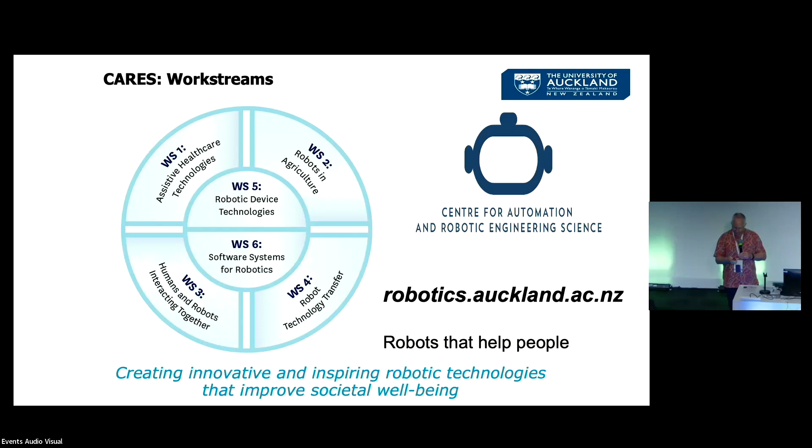And this is an example. I'll talk a bit now about our robot assistance project. Let me just figure out how to start the video.

Here we go. So this is one of the more recent studies we did, of robots with people who have respiratory problems.

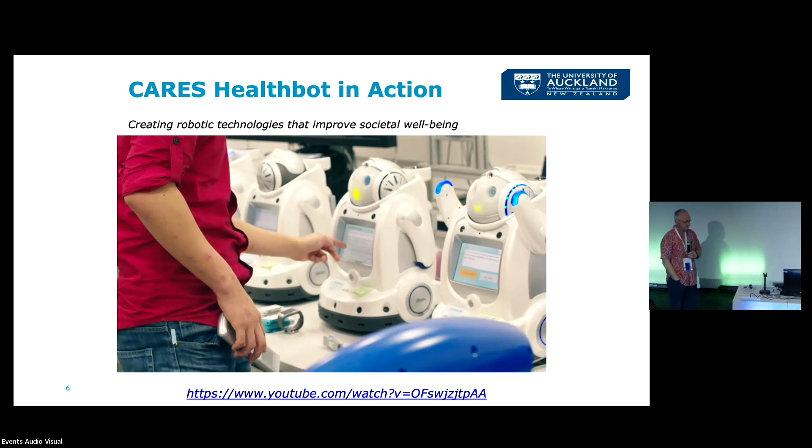This project is funded by the HRC as part of a partnership program in innovation. This particular project is looking at whether the robots can reduce hospitalizations in patients with chronic obstructive pulmonary disease, which is a chronic lung condition.

In this study, we are recruiting 60 patients. They're recruited from hospital, so after they've been in hospital for a COPD exacerbation, we recruit them and then we randomize them. So half of them get a robot to take home with them and half of them get standard care.

This project is across both the Faculty of Medical and Health Sciences as well as Middlemore Hospital, and also with Faculty of Engineering. The technical challenge for us has been to put the software on the robot so that it does the functions it needs to do in interacting with people. And that's really taking some kind of medical therapy and translating it so that it runs in software on the robot.

There's a lot of things that have to kind of align. It's not just one bit of software like a game or something that has to integrate with the rest of the environment. So that's quite a challenge to get it robust enough. Those are the main challenges.

Another one was connecting devices to the robot. To do that, we need to hook a device up to the robot and program it to talk to that device. That shouldn't be challenging, but in practice it turns out to be more challenging than expected because it's quite hard to get devices that are open to us connecting up to them. So we had to do quite a bit of work.

Personally, I'm amazed at how well the robot is actually getting along with our patients. The patients have taken very well to the robot. They see them as an extra companion at home. But in addition to being a companion, it actually helps them check their health status, and then it gives us the connection as a health professional to monitor them at home. So the patients absolutely love it.

Please take your pulse.

When I actually got to use him and found out what he does, I was excited. It kind of changed my life.

Quite often, older people who live alone are at greater risk of exacerbations. So we hope that these robots will reduce some of that isolation.

He's very good company, and he does remind me of a lot of things, mainly my medication.

Let me know when you are ready to take it.

He's on the ball for me all the time.

One of the things that's different about this project is we really want to understand more deeply about how people and robots interact. In this study, the robots are with people for 4 months in their homes, 24/7. That's a long time for a research study and for us to analyze and record data. We're getting information about what happens when people get used to the robot, have time to think about it, and use it every day.

Thank you for taking your medications.

So we're hoping functions on the robot, such as reminding people to take medication and reminding them to do their exercises, is going to prevent them from getting sicker. Also, because the physiotherapist can monitor their symptoms over time, if she detects that something's going wrong, she can intervene earlier before the patient gets so sick that they turn up at the emergency department and have to be admitted.

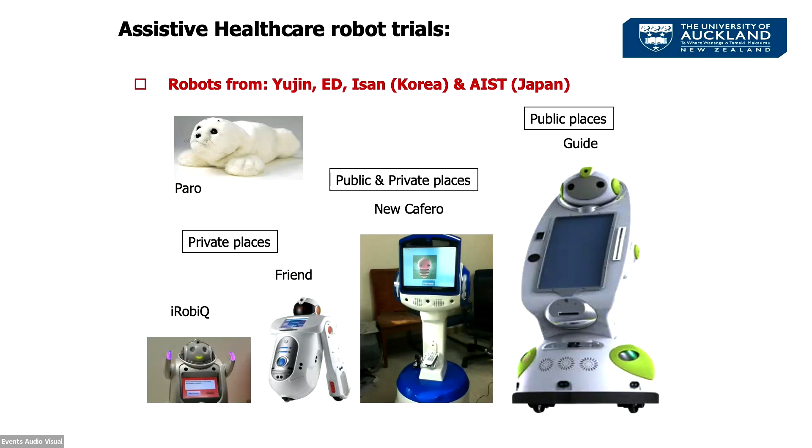This little one here was made for kindergarten teaching in South Korea, sold in China for kindergarten children, and it had content on it for kindergarten education. So we reprogrammed it to sit on the bench for an older person and interact with them, remind them to take their medication, remind them to do their exercises and so on.

These robots had similar versions of the software to do the same thing, but in larger rooms, larger settings. This large one was kind of in public spaces in the retirement village, or in the doctor's clinic, where people were going to see the doctor in the waiting room, and could interact with it in a private or a public mode, if you like.

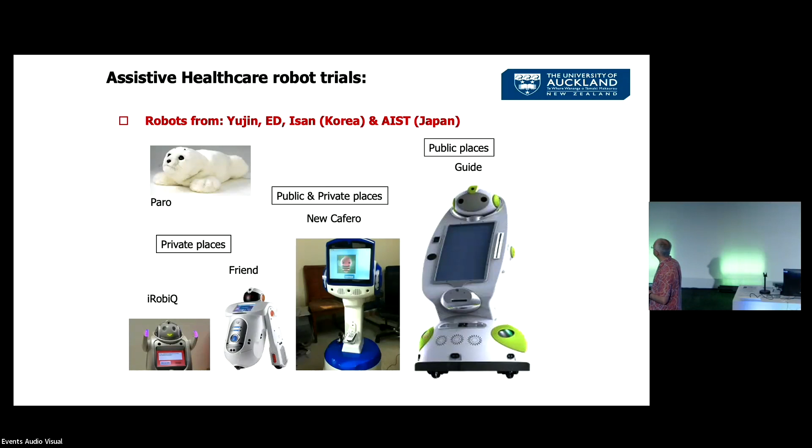That work has expanded - we did another study after that on a robot to help people with mild dementia. That again was jointly with some Korean researchers at Ewha Women's University in the Brain Research Centre there. Professor Kim there scans people's brains and showed after 4 months of therapy with a robot like these that people's cortical thickness was improved as a result. It's physical and cognitive therapy that the robot is doing, which is quite interesting.

We've moved on to give the robot better dialogue and to understand speech better. We're working on making the robot interact at an emotional level, understanding people's emotions and also giving appropriate emotional responses - I think the robot should show some empathy when it's interacting with people. So the current studies are trying to figure that out.

That's also moved on. My colleague Ho Suk An, who has done a lot of work in these studies, is now making a robot to translate sign language for Indigenous Maori people, so that Indigenous deaf Maori can have more interaction using sign language, because this is a bit of a gap at the moment. He's got a couple of projects funded for that.

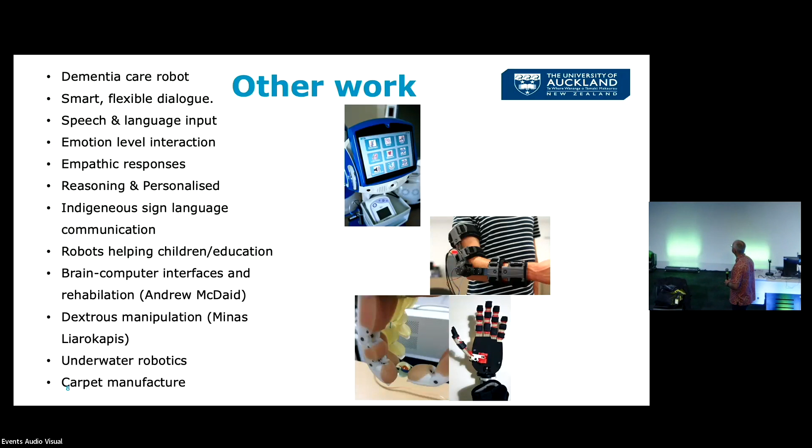So those are the kinds of things we started doing. In recent years, we've moved on to work in farming. I always thought we should be working in farming because that's the key New Zealand industry, if you like. So we started in 2014 with a project to make a multi-purpose orchard robot.

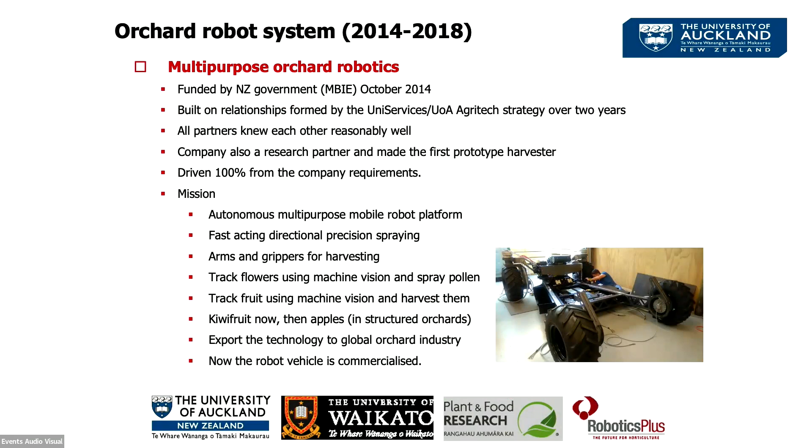This project was funded by the New Zealand government - MBIE is one of the departments who fund innovation and research, and you have to propose projects and give them a business case to go with it. We did that along with Steve and Robotics Plus, who you heard from yesterday, who was a partner in this project. The project was really driven by our university-wide strategy about agri-tech and working with the New Zealand farming industry.

Historically, University of Auckland is not an agricultural university, and there are agricultural universities historically in the country. Waikato, Massey, Lincoln were originally dedicated to training the agricultural industry in New Zealand when those universities were first set up. They've broadened their scope now so that they teach more or less everything. But we've never been focused on that.

So the strategy was to partner with other people to do agri-tech, to bring technology from our university into the primary sector to improve productivity and outcomes. The important point is it's all about relationships. This agri-tech strategy, and the people at Uni Services who developed the relationships, led to these projects, emphasising the importance of people relationships to get anything going.

On the research side, we all pretty much knew each other well. There were 4 partners in this first orchard project, and it was driven 100% by the company requirements. The Robotics Plus guys - Alistair had made a first prototype harvester in his PhD project, then development got held up by a kiwi fruit disease problem in New Zealand for a few years. Then they came to us and said, we want to make better versions of this.

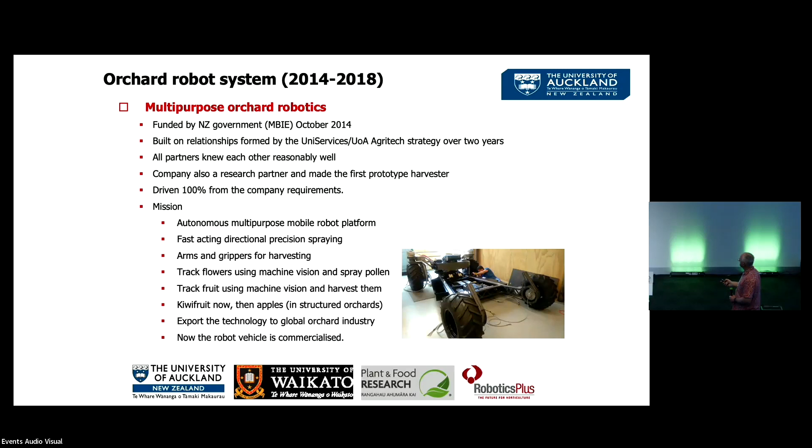So this video is going to show you about that robot doing the pollination and the harvesting.

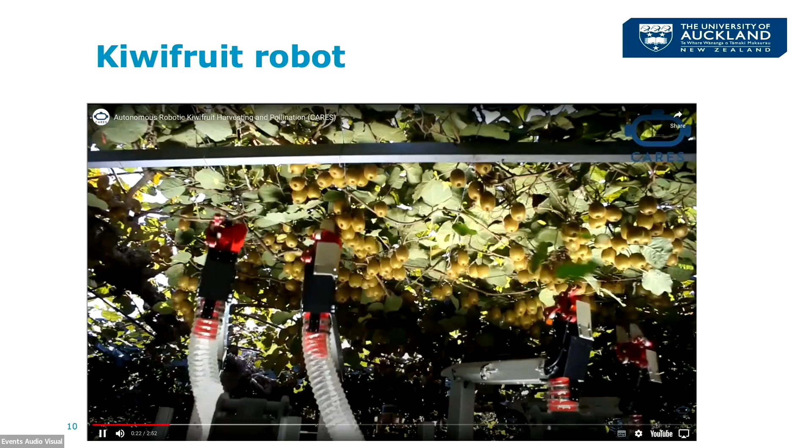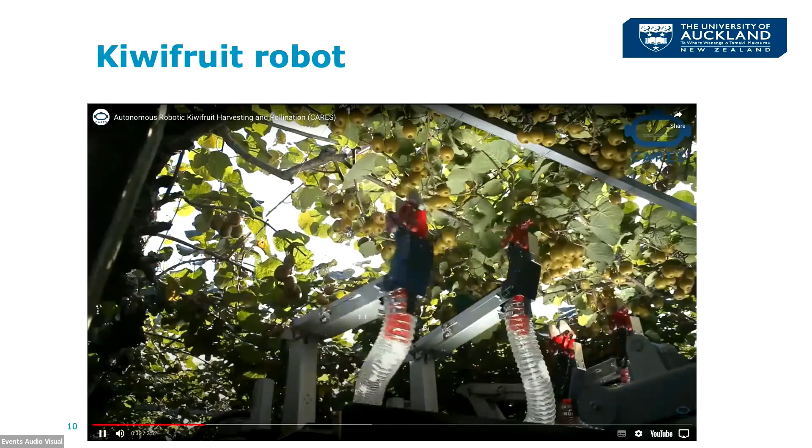There are cameras up at the kiwi fruit, finding the kiwi fruit and telling those robot arms where to harvest them, and then they just go down a tube eventually into a bin. We used artificial lighting underneath to light up the canopy a bit because it's a bit dark. Although the vision problem is tricky because you're looking up through the canopy at the sky, sometimes at the sun, which makes it more difficult.

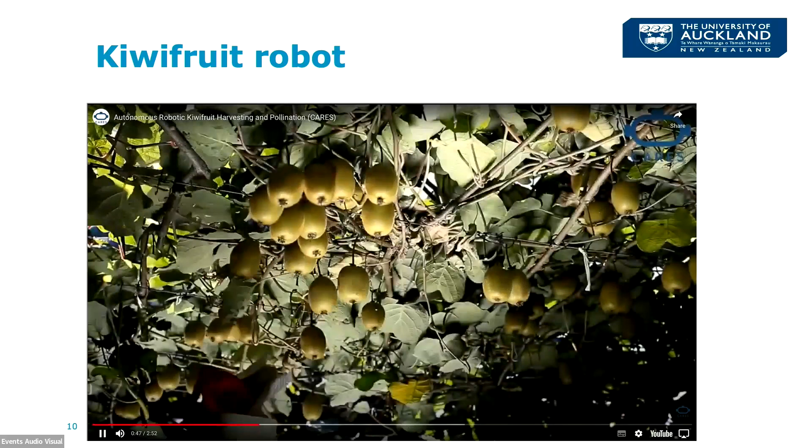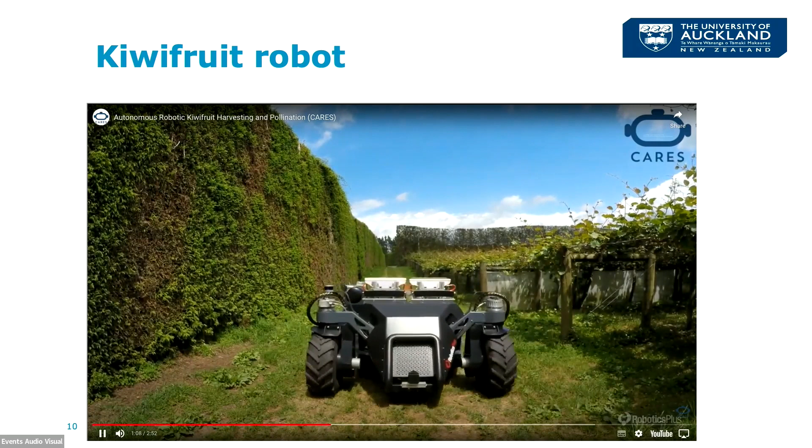The commercial trick here is you need to do it fast. Nearly every robot harvester made in the last 50 years, and there's a lot of them, has been too slow to be economic. So it has to be fast enough, firstly, to be economic, and secondly, to harvest the kiwi fruit in the orchard, because you'd probably want to go around and do all of the orchards in your region - you'll probably be contracting it as a service.

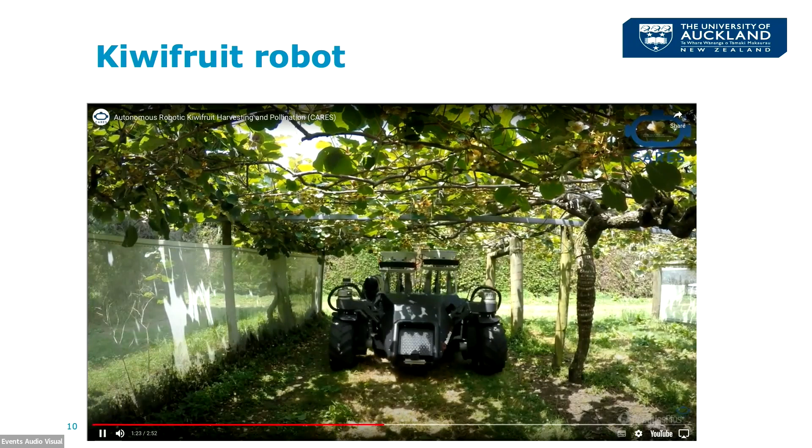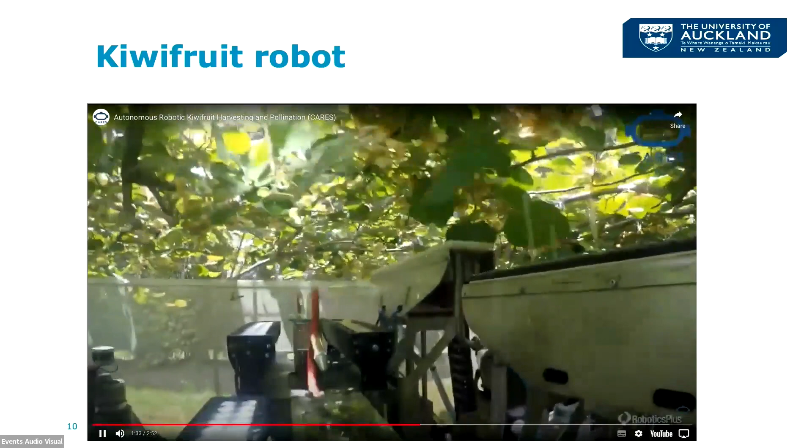This is the pollination now, same robot but with a bank of nozzles on it, spraying pollen in solution at each flower. The technical problem here is there are cameras that find the flowers, track the flowers, and tell the sprayer exactly when to shoot a bit of pollen. It's like inkjet printing, pretty much. You can see it's hitting some of the flowers.

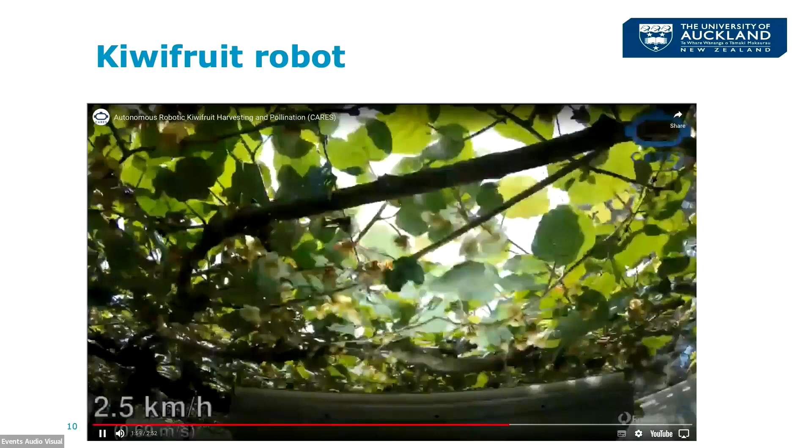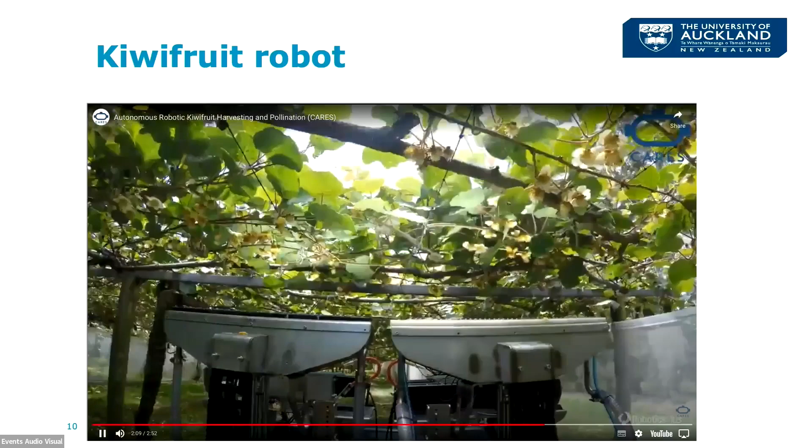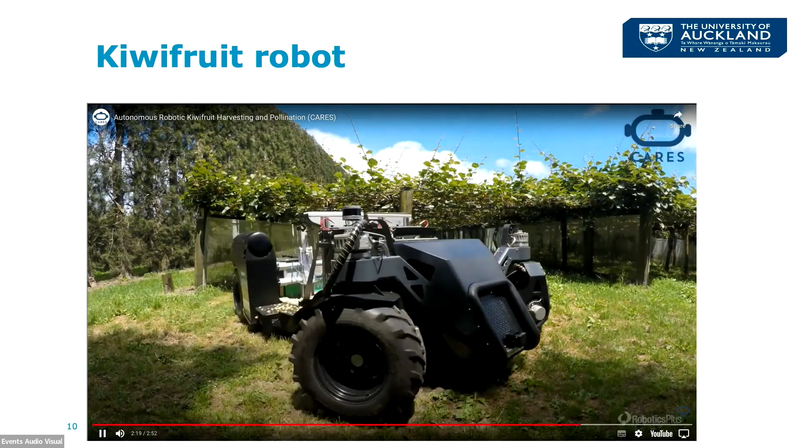By the end of the project, we were getting pretty successful at hitting the flowers. Evaluation's a bit tricky - you have to put a bag around each flower before it's pollinated, at the beginning of the flowering season, then take it off, put the robot underneath and pollinate the flowers. Then you put the bag on again, wait till the kiwi fruit grow out, and evaluate the size, shape, and number of seeds to see whether the pollination was successful - the better the pollination, the more seeds. So that's what we did, and it was reasonably successful.

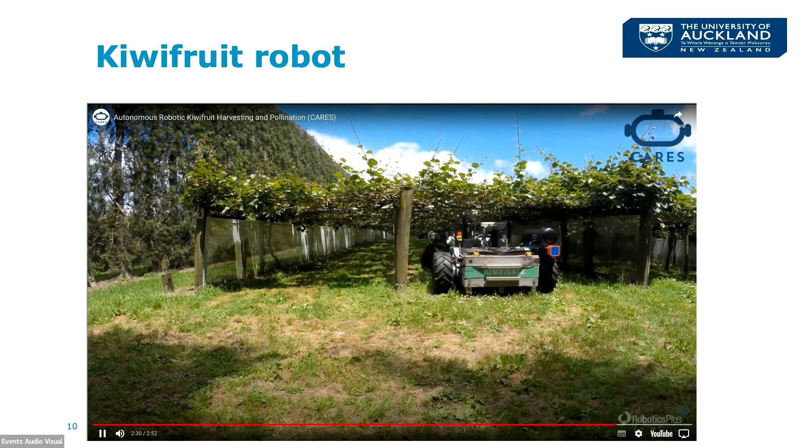So then at the end of the project, we transferred all that technology to the company, and they're working on commercializing it.

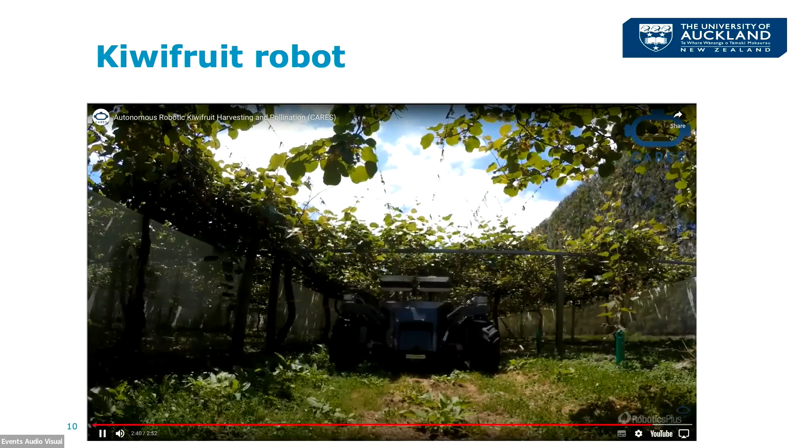So that project finished a few years ago, and then we started another horticulture project, this time talking to industry people about what they wanted in horticulture. Of course the discussion was about labour, because labour's always been an issue, especially here in New Zealand.

Often it's hard to get enough labour to harvest the fruit in the season. The trick is that the flowering of kiwi fruit lasts about 3 weeks if you're lucky and the weather's okay. If the weather's not good, it's shorter. You have to pollinate all the flowers of all the kiwi fruit in the region during that 3-week window. If you're doing research, you have to get your software ready so you can do your evaluation. If your software's got bugs and you can't get it working properly for that 3-week window, you can't get any data or do the evaluation you need.

You need thousands of examples to get any sensible evaluation, and the same with harvesting - a couple of months, depending on which orchard you're in, and you change orchard to orchard as the fruit is harvested. All the kiwi fruit are harvested, there's no selective harvesting. They're all harvested before they're ripe, because the business model here is that kiwi fruit ripen in the supply chain as they get to the market, so they arrive ready for customers to buy. So we need to do selective harvesting.

The window for harvesting and pollination is quite short, so labour has to be available to do that. This is why automation is a worthwhile task.

It's not the quantity of labour, it's the quality of labour - how good are the people? And... yeah, okay, I usually like walking around, which is why I got this, but maybe it's not really this plan.

So the industry people told us they want to improve the quality of what people are doing in orchards and vineyards. For example, pruning wine grapes - it's really important you prune the grape correctly to get the right production and manage fruit loading on the vine. Same for apples - normally a decent apple tree has about 5,000 flowers, but you're only really going to get 250 good apples.

So you chemically make the plant drop a lot of the flowers, but there's still too many, so people manually remove the small apples when they start growing to leave one really nice apple in each bunch to grow out for the export market. If you ask growers, it's not worth keeping more apples and juicing the rest - you just don't make money doing that. It's only the really good looking export-quality apples that make you money, so people need to do this, and it's expensive.

So they wanted to help people do a better job and also automate the task with a robot. There's a lot of data based and machine learning involved - software models capturing images of the plant, making a 3D model of it, because all these decisions are based on geometry. For grapevine pruning, it's all about the diameter of the cane, where the nodes are, and how that's going to grow into a reasonable harvest of grapes for wine.

That's how humans are trained to prune vines, so we wanted to use the same rules for our robot, and the same rules to show people where to prune. In our project, workers would wear a headset telling them where to prune the vine, as well as having a robot to do it.

The other thing we did was include a social science stream in this project, where people study how this technology will be adopted and used by communities, particularly how it will affect Maori and Indigenous communities. A team interviews the workers in orchards and vineyards, and the researchers, to understand how this technology can be diffused into those communities, because it turns out that's probably the most important thing.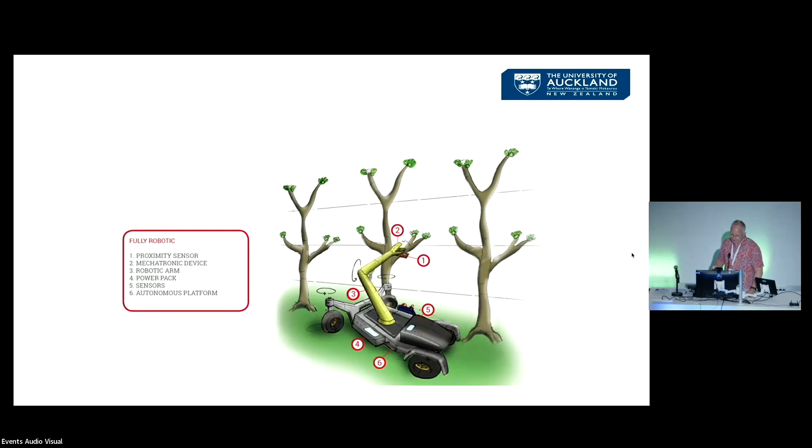And the way we did this was very much a co-design project with growers, including Maori growers, and the industry organisations and the technology manufacturers. So we all got together and designed this project, and then we get together regularly, and invite the industry people to come and see what's happening in the field when we're doing any studies.

The guys were in the field a couple of weeks ago doing some apple work, and earlier in the year pruning grapevines.

There are six research organisations involved in this project, so it's a mission to get everybody to keep on the same track and work together. We have a group that makes that happen, and an industry advisory group who we meet with regularly to get feedback about the project.

They tell us things like, yeah, well, we like your augmented reality system, but actually we'd like to use it for training. So we made a virtual reality system, effectively a game, to train people how to prune grapes, for example. That is being commercialized by a software company at the moment.

The industry is kind of desperate for it. The other study we're doing is harvesting blueberries, because that's a trick. Half the cost of growing blueberries is the labor for harvesting them, and it's hard. We can harvest individual blueberries, but that's too slow. So we're working on ways to speed it up.

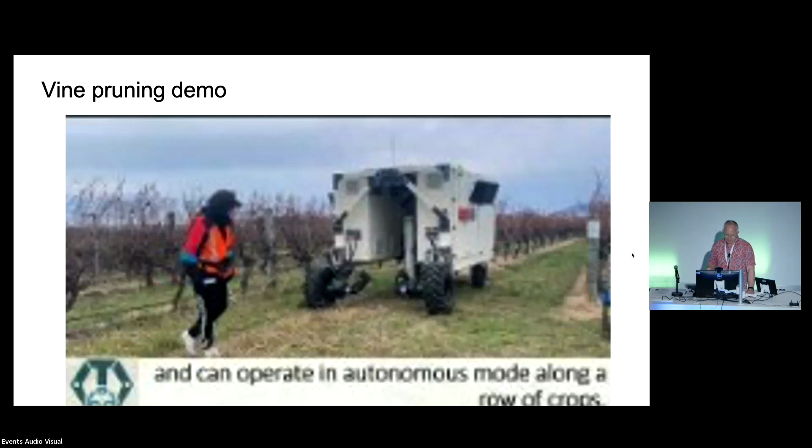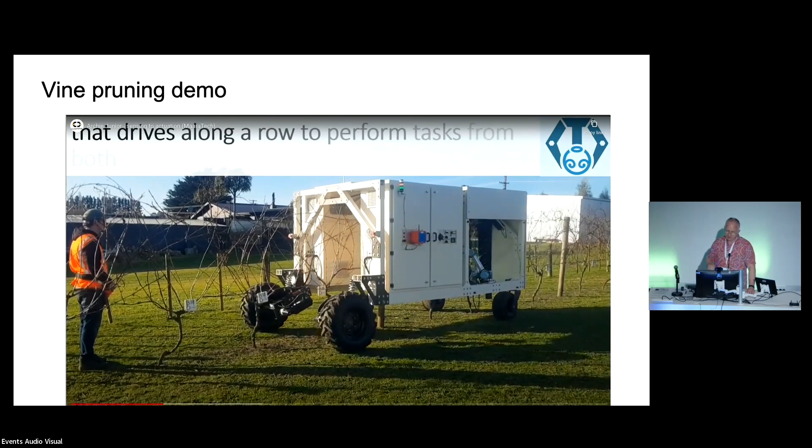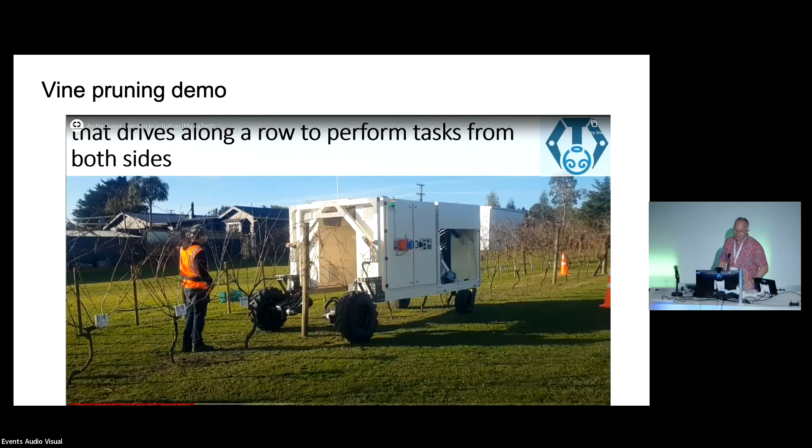We call it the MaaraTech project because Maara is the Maori word for garden. There are cameras on each side of the vine, taking images and registering those together, putting it into a 3D model so we can extract the geometry metrics that the growers use.

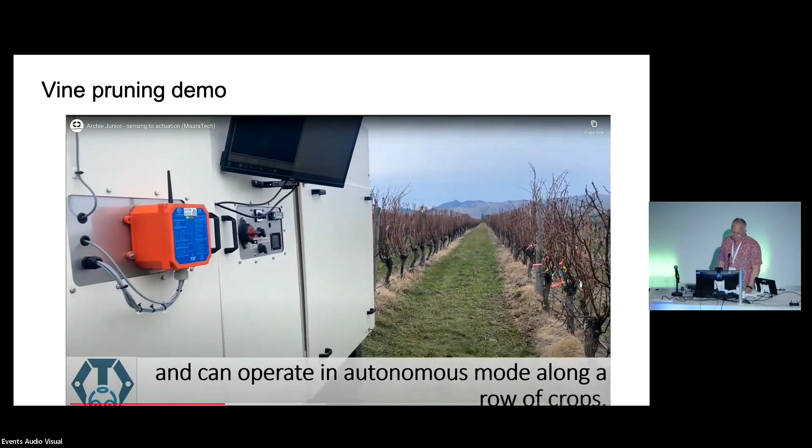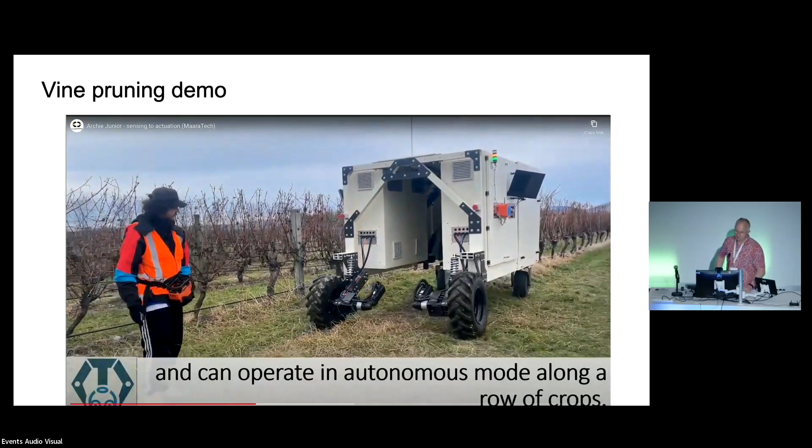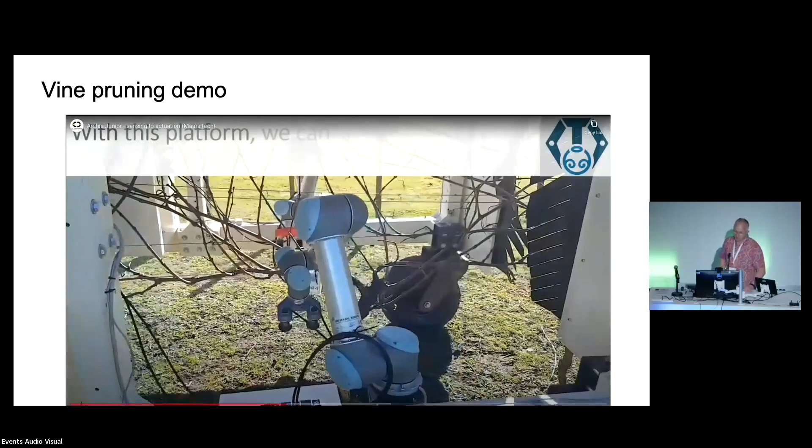It turns out every vineyard has their own rules for pruning, but they're all based on the geometry of the plant. So the idea was we would extract that geometry, and when going to a particular vineyard, apply their rules to the pruning, and the robot or the headset would make sure it was pruned according to their rules.

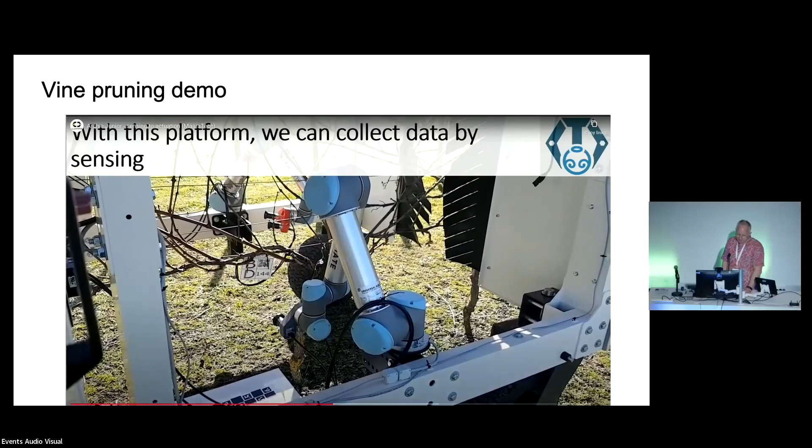So this is just scanning - these are cameras on the robot arm scanning the vine. It's going to need to be faster in the long term, but at this stage of the project, we're just getting it to work.

The idea is to generate a 3D model and then extract the features from that, particularly the nodes and which canes there are, and the base, which is called the head of the vine, that bit there. The geometry is all defined in terms of those things.

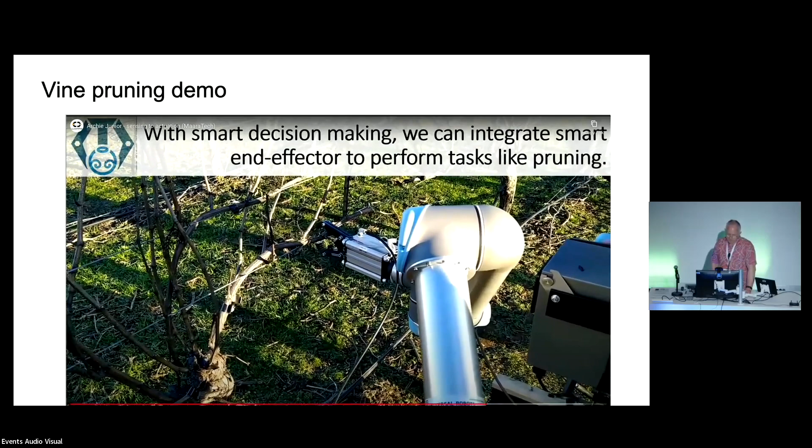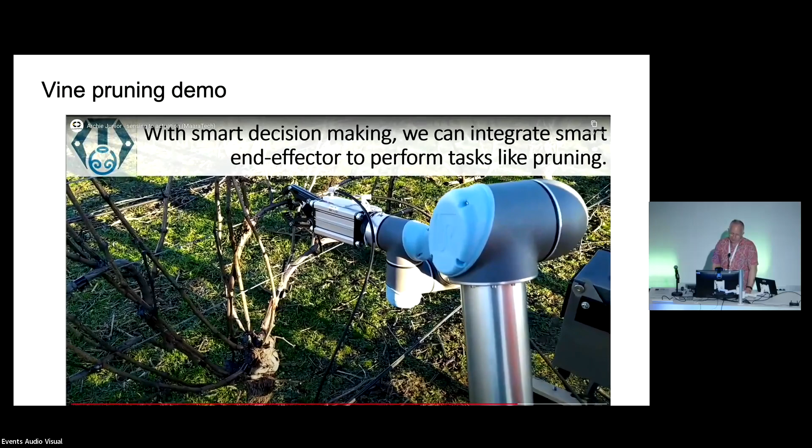The guys at Waikato developed this pruning tool. It's easy to cut the vines - the trick is not to cut the wires and not to damage them, because if you damage the wires, eventually they break. So this tool is designed to let the wire slide out of the way when the cutting tool cuts the vine or the cane.

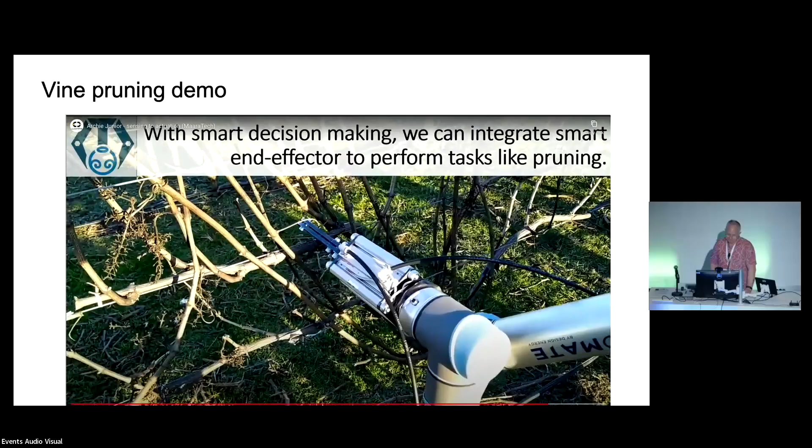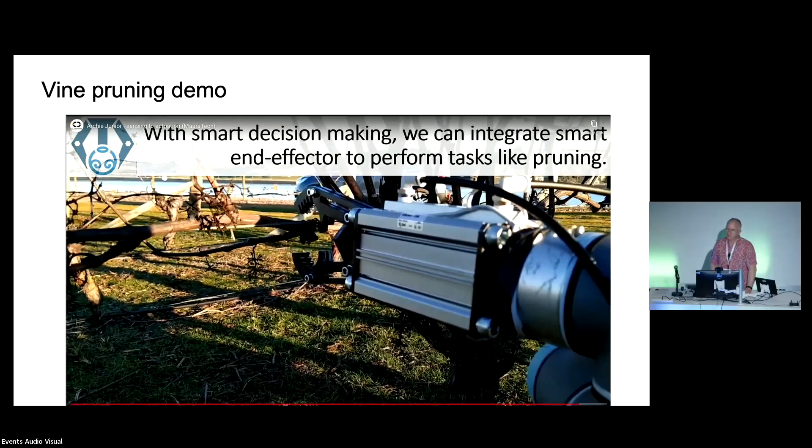At the moment it's kind of working, but to get to the end of this project, with a couple more seasons to go, we need to do hundreds, thousands ideally, of operations to make sure it's effective. The companies that want to use this kind of stuff want to see an evaluation that shows it's going to work in a commercial environment.

That's why it needs to have quite a lot of evaluation, which is what we want to do. And there's nothing bad about that, because when you publish your work, you need good evaluation anyway - so it'll help us publish it as well.

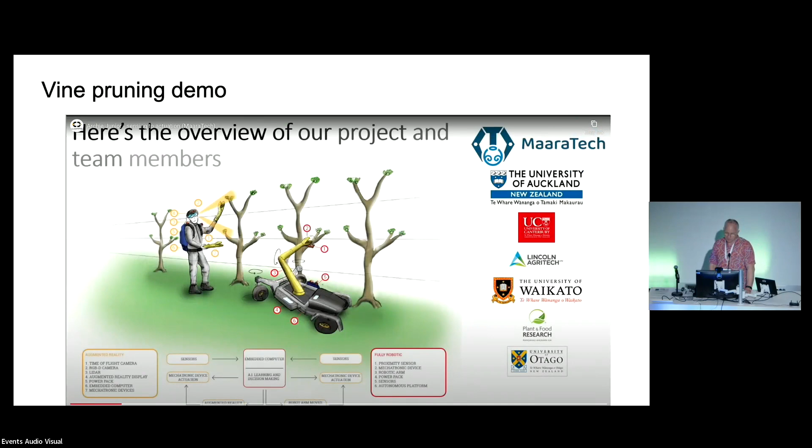I think we already saw all that.

So for thinning apples, the guys at Waikato made a larger Archie, called Archie Senior, which is high enough, 3 or 4 meters, to go over an apple tree row. Typically apples are grown in a 2D structure, and it turns out to be the best way to grow apples anyway, on a flat plane with a certain spacing between the apples and the rows, which works for automation, and in particular this kind of automation. That gives better productivity for apples too, because you get more light, which is the key point. The plant people have studied this, and there was a big project on this in New Zealand in the Hawke's Bay, so we're using the same structure.

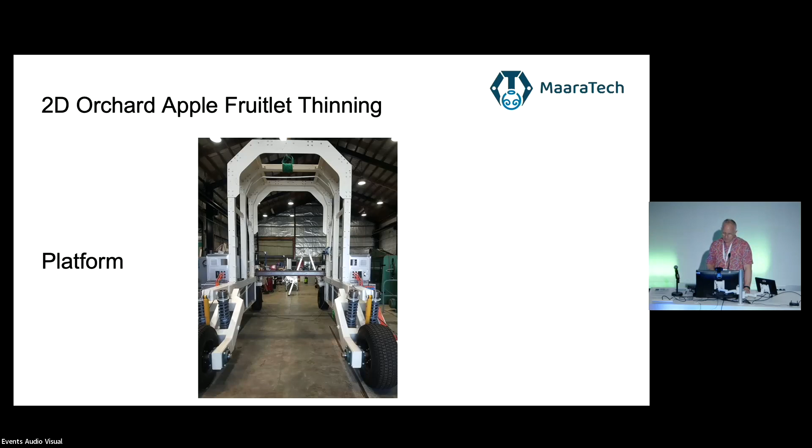Apples in Washington State, a lot of growers are doing the same thing. That's probably the biggest apple producing region in the world, I think, Washington State. So there's a lot of links between New Zealand and Washington State growers. We've visited, and they're also growing stuff on 2D structures. Sometimes it's a single 2D structure, sometimes it's sort of a V shape, which is pretty similar. But both of those things are good for automation, because it's flat and you don't need to reach into the bush, and you have less to worry about occlusion. So that's probably enough of that.

I'm going to run out of time, so I'm going to talk a little bit about the national scene in New Zealand.

There are probably 2 initiatives to talk about. One is a government project called Science for Technological Innovation, which I'm a deputy director for, and the theme leader for sensors, robotics and automation, a theme in that program. This was a program for advancing New Zealand's capacity to use physical sciences and engineering for economic growth. This project was $100 million over about 10 years, and we've been funding other projects to advance that and improve the capability in the country.

One of those projects was run by Armin Werner from Lincoln Agritech, running a project about adaptable robots, making robots work better, mainly outdoors, but also in factories. That's got 6 research organizations and an industry advisory group, and the focus is kind of outdoors, which in their case is about forestry. So making a robot for forestry, and I'll show you a little slide on that shortly.

The other initiative is NZRAS, New Zealand Robotics Automation and Sensing, which is a network organisation we put together about 5 years ago with mainly a bunch of researchers, most of the robotics people in the country. So the Waikato guys, Mike Duke and Lim, do a lot of agritech work. At Canterbury, Richard Green and his colleagues had already worked on grapevine pruning in the past, and they work on our MaaraTech project, now working with drones.

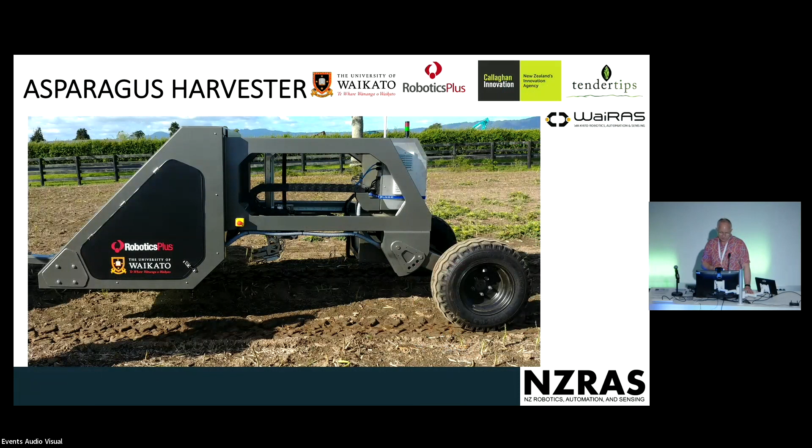As an example, this is some of Hin's other work at Waikato: an asparagus harvester, which is doing pretty well, and they've taken it across to California and shown it and got a lot of interest. So also working with Robotics Plus, that's turning into a product.

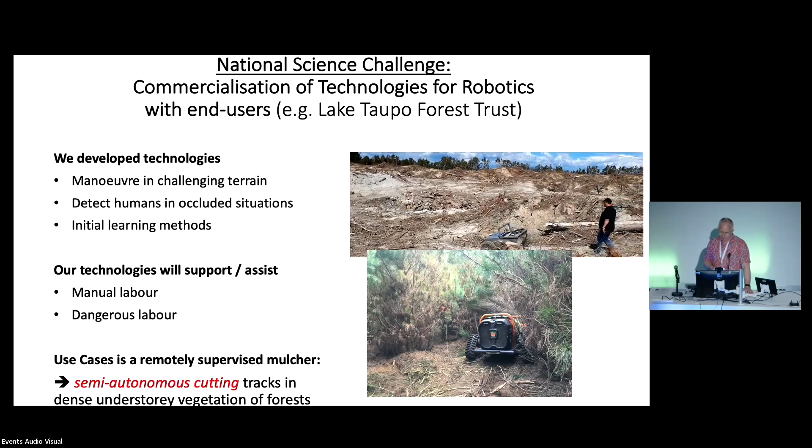And this is the forestry robot I was talking about, which is pretty much similar to the substation monitoring robot. That's evolved now into a project for mulching and forestry tracks, kind of keeping tracks open in forest. And the Lincoln Agritech guys are also working on the pruning work with us in the MaraTech project.

In terms of the robotics industry, Robotics Plus, as you heard about yesterday, is a key player in New Zealand robotics. Also, there are a couple of companies that do meat processing. One of them, Scott Automation, in the South Island. Another one is Miller's Mechanical, which is derived from the original refrigeration technology used at the turn of last century, sending refrigerated sheep meat to the Northern Hemisphere. I think the first refrigeration ship was in like 1898 or something. So it's been a big thing for New Zealand all that time, and that has moved on to meat processing automation to improve productivity in the industry.

Am I run out of time, have I? Minas is approaching, or maybe he's just getting close.

In Christchurch, there's a nice company called Design Energy who will design a robotics installation for your factory, and they've installed hundreds of robots around the country doing small operations, for assembly for example.

Cando's an integrator, which came out of an organisation called Callaghan Innovation, a government innovation initiative. Rocos is an example of a startup company started by a couple of young graduates in Auckland. They made a dashboard for controlling swarms of robots, and they were recently acquired by Drone Deploy, so they're carrying on.

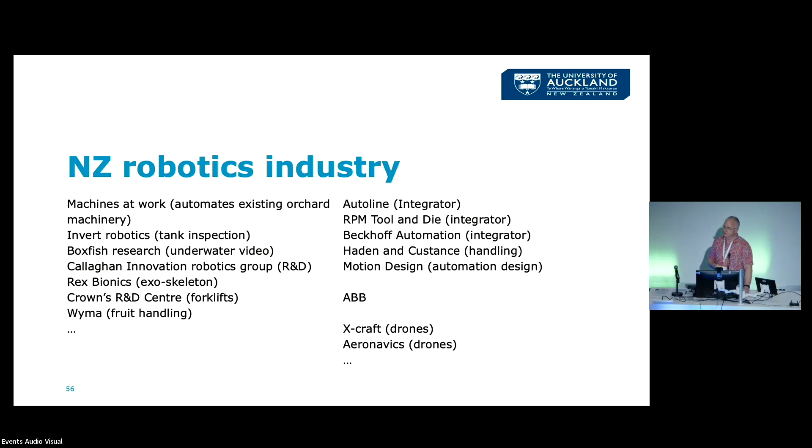ABB's got an office here. And then there's a couple of drone companies that do stuff, for example, going to the Pacific Islands when there's a disaster to capture data about what's happening.

And so we created a roadmap, because the thing that's missing in New Zealand is bringing the whole ecosystem together. It's like a lot of places - we don't talk to each other enough, we don't talk to industry enough. So bringing that together and getting the government to front up to make it happen a bit better.

So there are quite a few opportunities, mainly about automation. New Zealand's quite low on the productivity ranking because we work too many hours and don't make enough money. So we need to improve on that, and improve on labour issues.

Automation in the primary sector is a big thing. There's a government program to improve that, because the primary sector is the largest export for New Zealand, and it's on the farm and processing after the farm. Also, fibre is important.

Wool and carpet are really important, and growing. There's a few companies, but they don't use enough wool. So if you'd like to use wool for something, please go ahead.

And there's opportunities with climate problems, which are happening everywhere around the world. In New Zealand, the Maori economy is growing faster than the rest of the economy, so there's a lot of opportunities for automation and improvement of productivity there. And health and safety is important in forestry - that's why those guys are working in forestry, because it's probably the most dangerous industry in the country.

Healthcare and social support - I think there's a big piece about mental health, for example, where robots could help more. New Zealand's got a good research and development capability, at least we think so. So bringing that all together a bit and improving our commercialization - those are the opportunities.